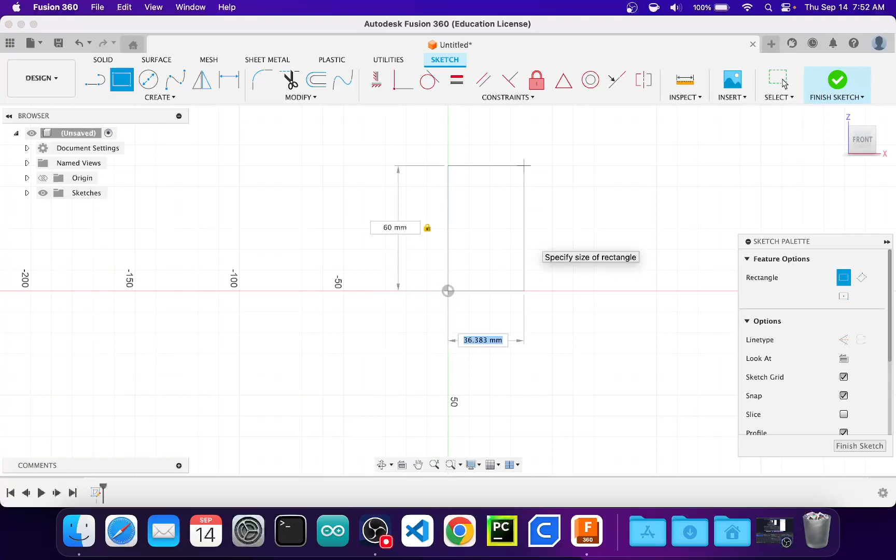So you can see I have a new design, nothing on here, no sketches, and I am going to make a box. So I'm going to create a sketch. My box is going to be relatively small, let's say 60 by 60 millimeters. And I am going to build a wall by doing an offset face. I hit the O key, I select the curve, and I'm going to offset it by 3 millimeters.

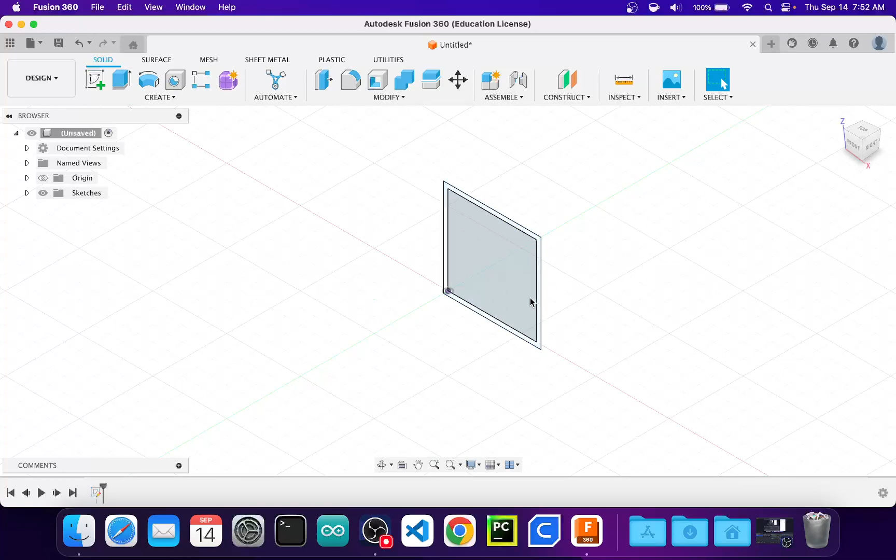That's going to be the wall size of my box. You can see how this sketch, when I extrude it in 3 dimensions, is going to build a box. So the outer length of the sides of my box is going to be 63. I'm going to extrude the side up 63 millimeters, make my sketch visible again, and extrude the base 3 millimeters. That's going to make sure I have an actual cube. Now it's a 63 millimeter cube, not a 60 millimeter cube, and the internal volume is 60 millimeters.

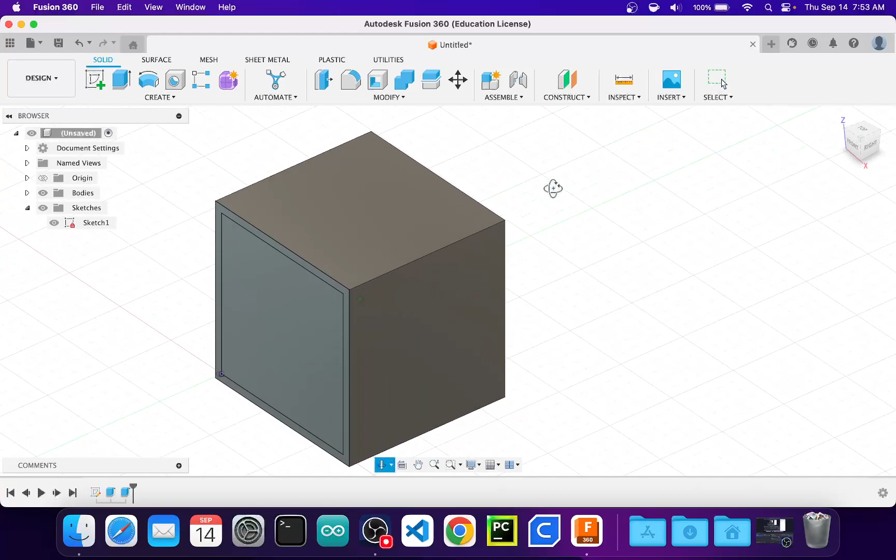So I can inspect this, make sure I've done my dimensioning right, hit the I key. That's 60 millimeters there. I can see that both of these are 60 millimeters, so I know the interior is actually a cube, but I should inspect this one as well. Also 60 millimeters. I know the interior volume is a cube. I can inspect the outside, 63.

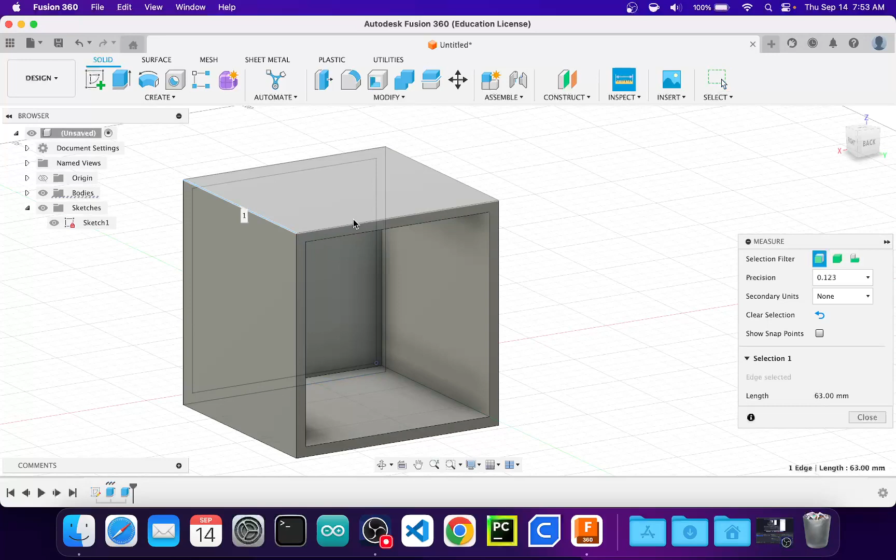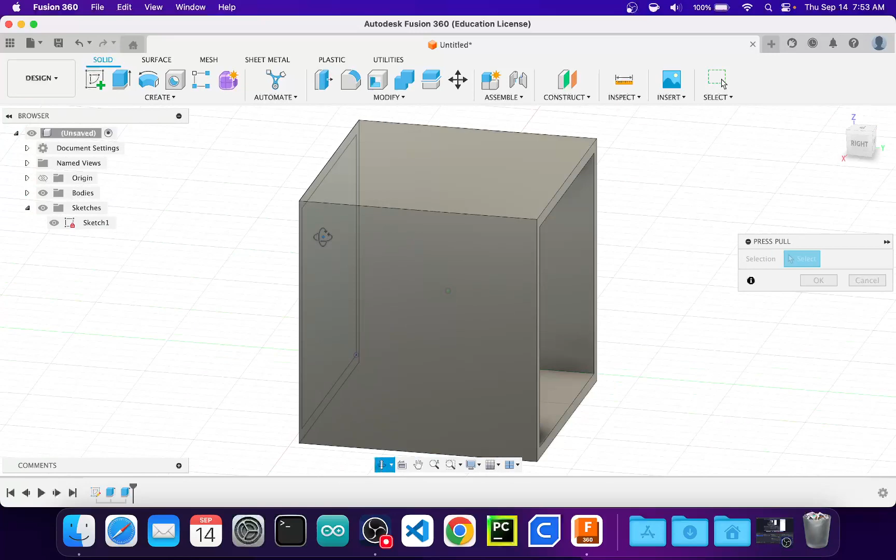66, because it's got 2 of these. So if I want this to be perfectly cubic on the outside, I need to extrude this by... I need to make my base thicker. We're going to make our base 3 millimeters thicker. And you'll notice that comes out the other direction from the sketch. So now I should have 66 external in all dimensions. This is a good example of why you should check, because there was something I did not account for.

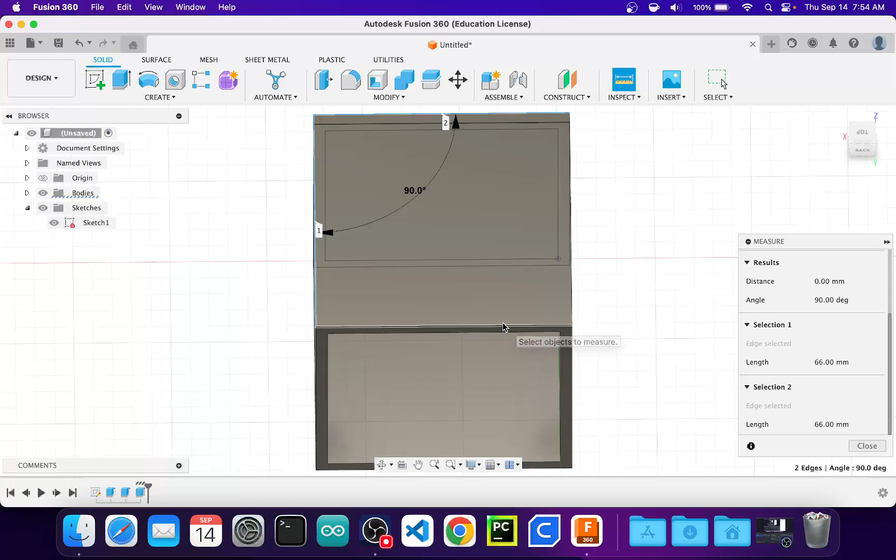Oh yeah, I need to do this one. There was something I didn't account for in the design. These should all be 66 millimeters now. Yep, and I had some specific things in mind. So if you do the checks inside of Fusion 360 when you're actually building it, it can save you a lot of time down the road.

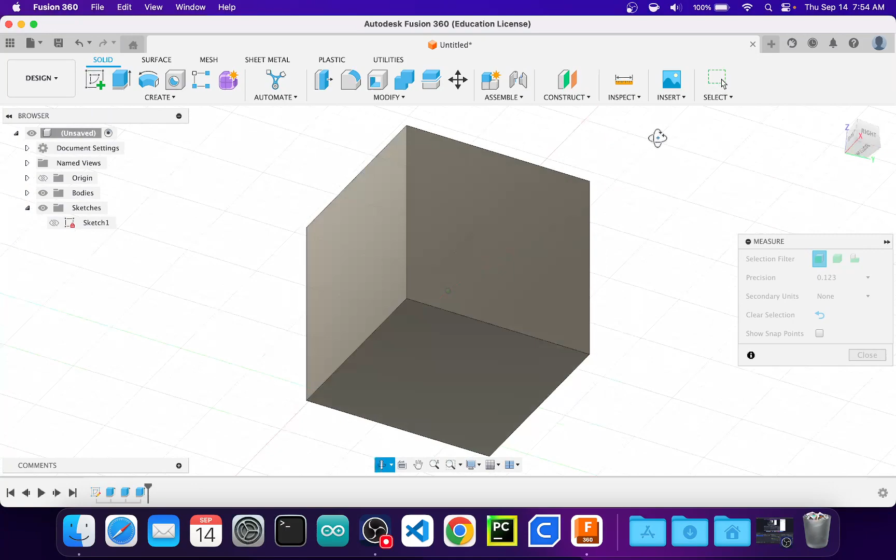So I need to find... there we go. So there's the interior space, and there are the sides. I'm always going to fillet stuff like this, I just think it looks a little bit better. We're going to put a relatively small fillet on here, maybe 3 millimeters. Now, I don't want this part to be smaller internally, so I am going to fillet these as well.

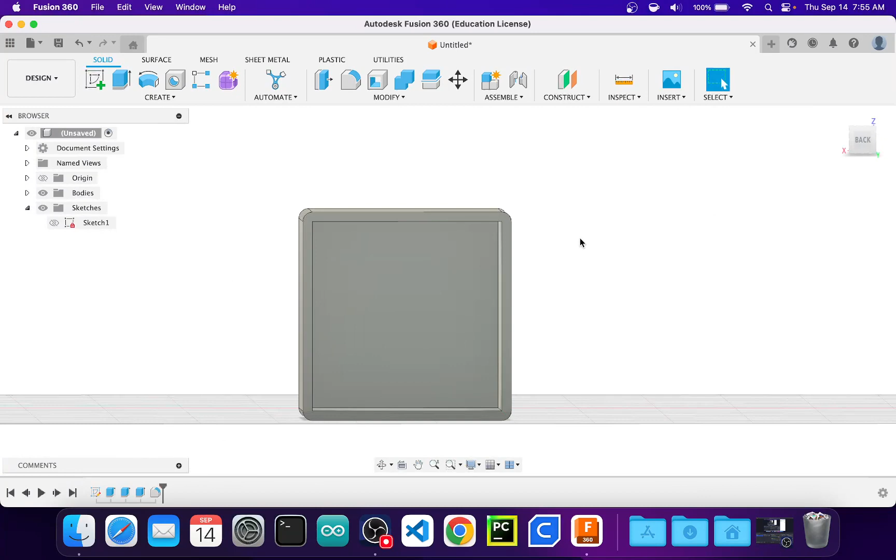And if you fillet an internal edge, it's going to actually increase the volume of it. So we're going to have a nice, clean 3 millimeter edge all the way around after I fillet this as well. See, that brings it in. So this is a pretty good box. What I want to do with this box is add a little bit of embellishment to it, because that's something we haven't really done yet.

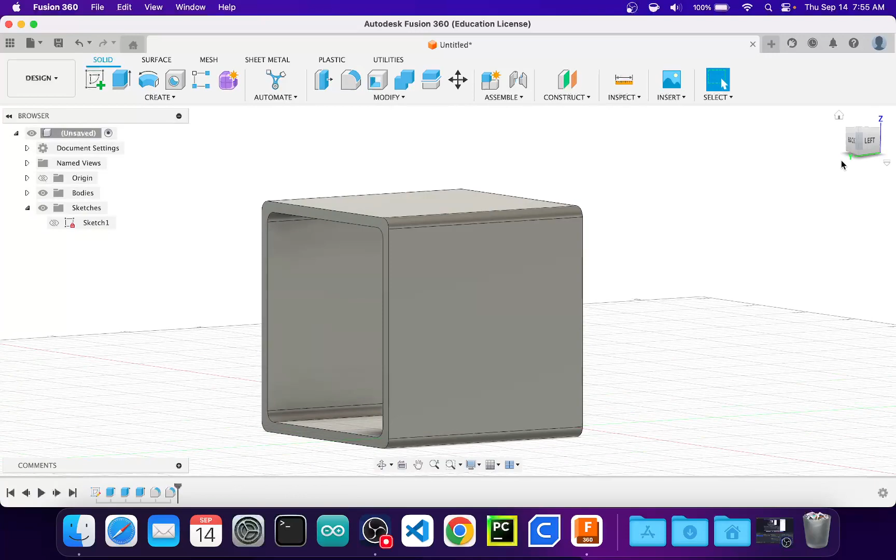So I need to center on one of the faces, and I'm going to make sure that it is facing up. So let's center on this, rotate it this way. The opening is up here. It's snapping it back when I do that, so I'm going to do it one more time, left.

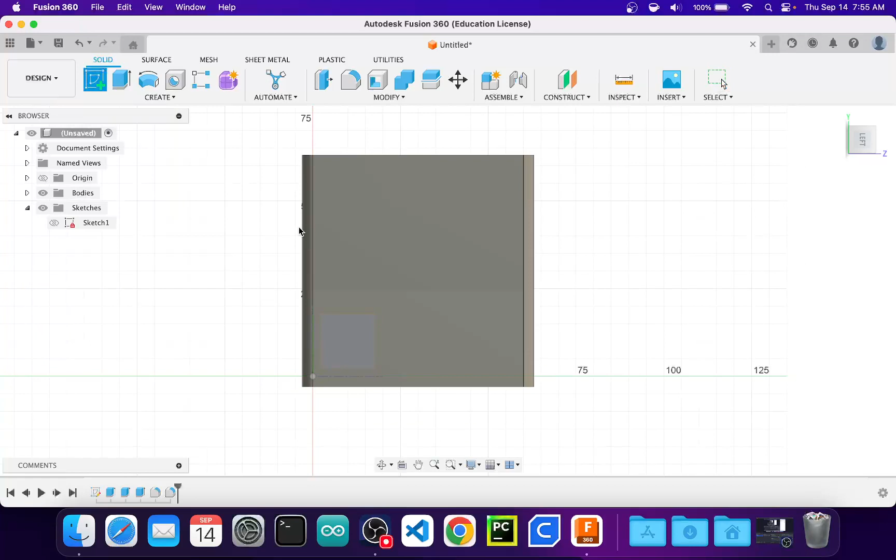Now we've got the opening facing up, and I'm going to create a new sketch on one of the faces. You'll notice I am not selecting the plane, which is what happens when I click here, I'm selecting the face itself. It's important to make sure if you're doing modifications to a face that you actually do the sketch on the face. Okay, so helpfully it rotates it around again for me. I don't want to do that, I want to rotate it back.

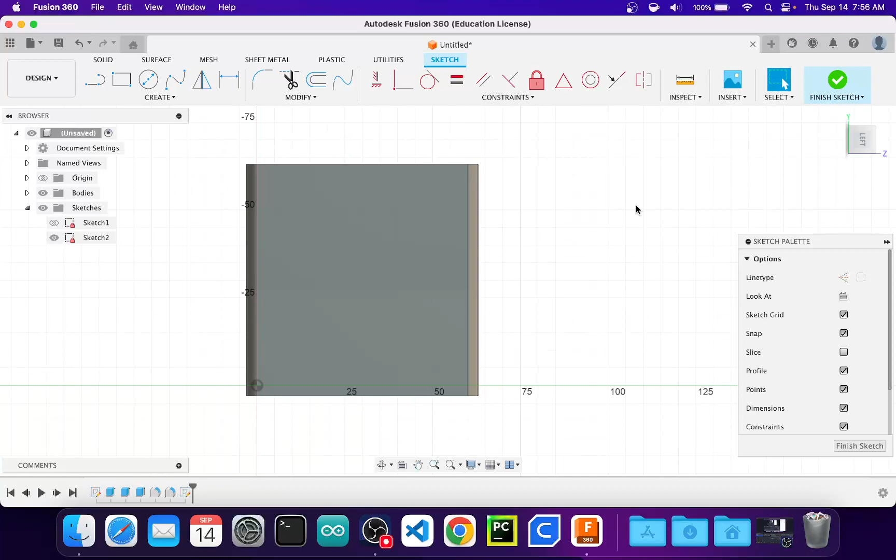I want to make sure, because I'm putting a design on this box, it has a desired orientation, so I want to make sure that I'm putting my design in the correct orientation. So one of the ways I can add

embellishment in Fusion 360 is to add text. You can go to create, then text. You can do text along a path. I haven't built any paths here. If I wanted to, I could put text on the path, but for right now, I am just going to create a little box here.

You'll notice this box, you can use the guide, so you can use lines and midpoints and stuff like that on your Fusion 360 drawing. You can set the height in millimeters of the text. This is a 66 millimeter tall box, and 10 millimeter text looks fine. I might want to center align it.

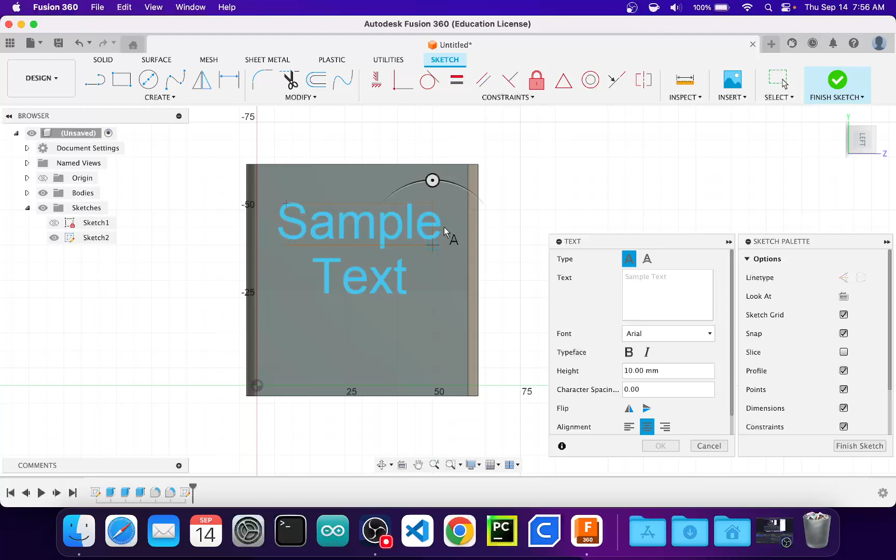Let's see, I can rotate it, but let's say I want to do it this way. I want to put a little signature on it. Okay, I want to center the text horizontally and vertically. That's going to make it a little bit easier when I try and center it on the object.

You'll notice it's actually much larger than my text box object. That's okay, I can grab this and drag it around. And I could do a line, and dimension the text with respect to the line. I'm not going to do that right here, I'm just going to go ahead and finish the sketch.

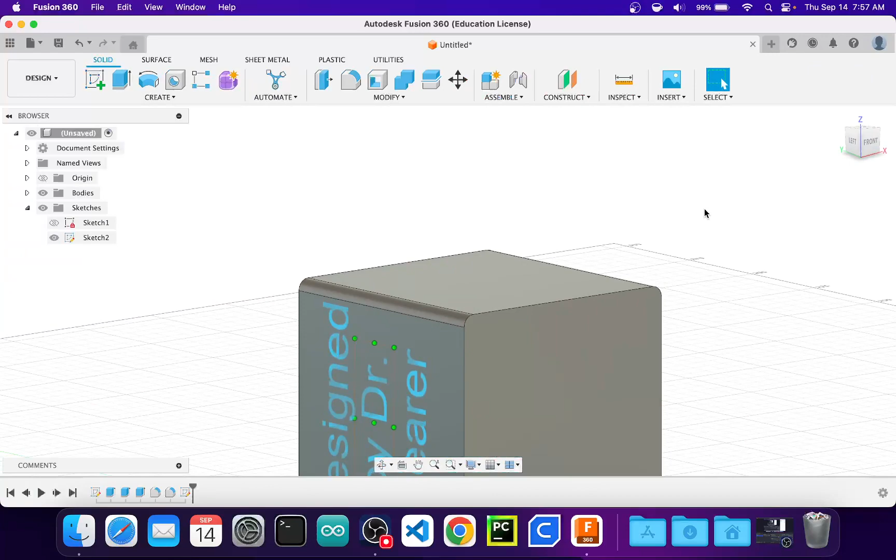And so what that gives me - and again, you can see it really doesn't like me to orient it that way, it keeps on snapping it back - but you can see this is oriented the way we wanted it to be. So I have two options for how I'm going to actually make this text show up on my object.

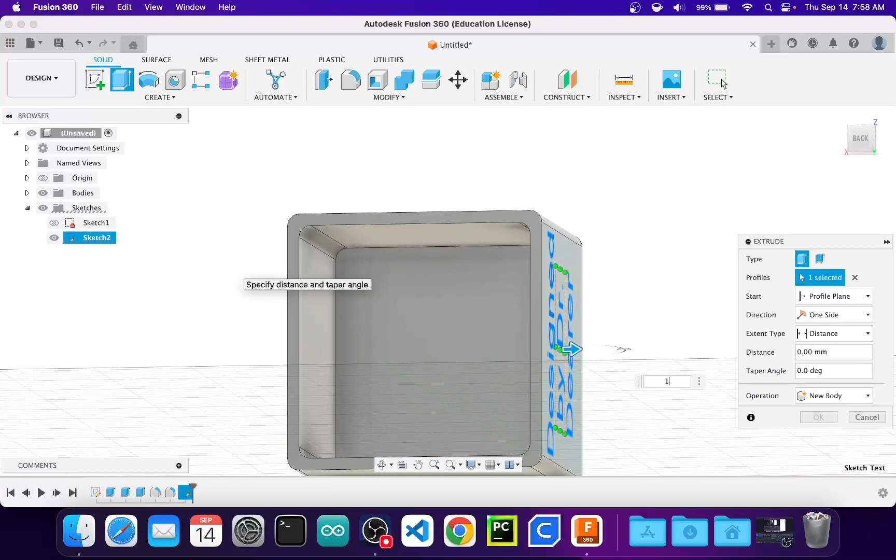One of those options is to press pull it out. So I can select the text as a face, and I'm going to orient this like this, and I can bring it out by 1 millimeter. If I do that, it will actually print this text as a part of the box in the plastic, 1 millimeter out, so you'll ask yourself, well, what orientation are we going to print this in?

And if we print it like this, how is it going to handle the overhang on that text? It should do okay with just 1 millimeter. You might have some edges that look a little bit worse for wear, but this is something you'll want to just mess around with and see how it actually prints.

So if you were doing this in production, what you would want to do is a smaller test where you do like a 10 by 10 millimeter cube. You put one letter on it, either press pull it out or press pull it in the way that you want to, and see how it looks.

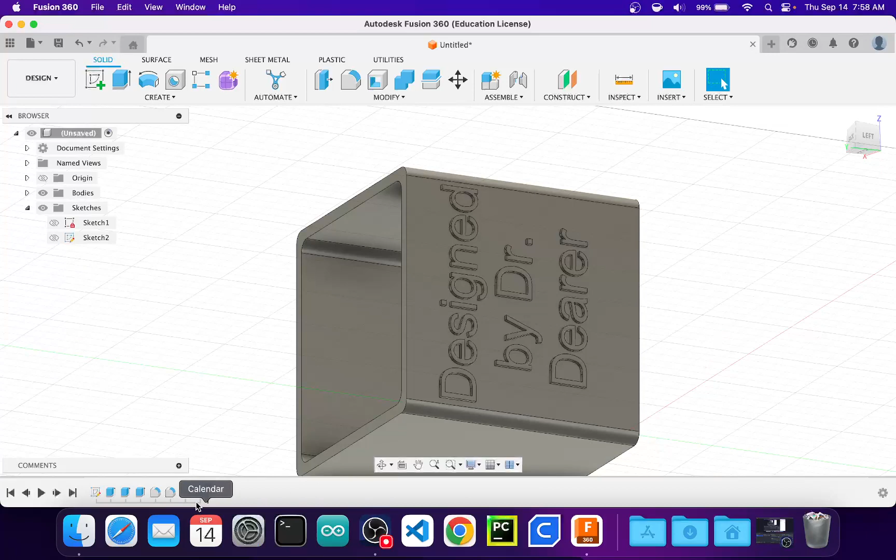So the other way we can get this to show up is we can press pull it in. Instead of going 1 millimeter, I'll go -1 millimeter. Let's go -2. We need to change the operation to a cut and hit enter, and you'll notice now it is inset - it doesn't go all the way through.

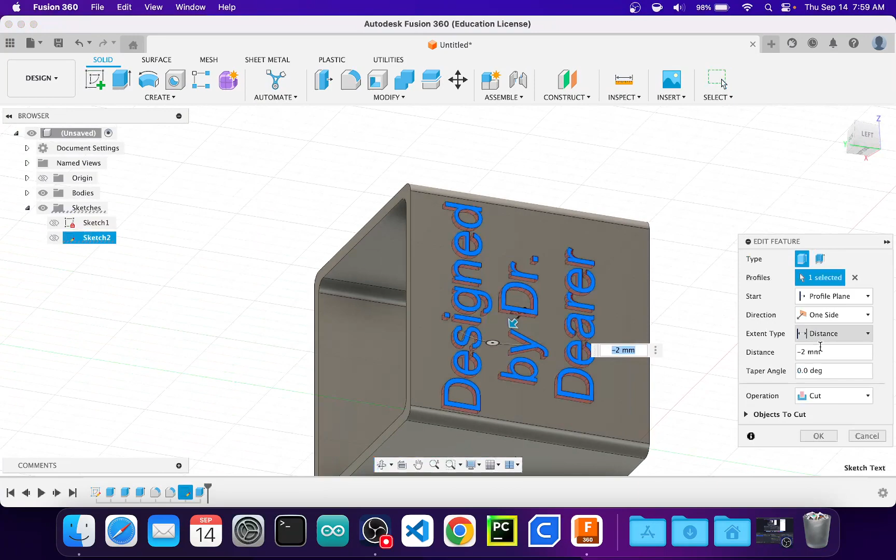I can change it so it does, but you have a problem with letters when you cut all the way through. I am going to have a problem with letters that have parts that are sort of floating off in space, like the middle of the B, the middle of the E. You'll notice it creates all these extra bodies because all of a sudden I have a bunch of separate little objects here, and we don't really want to do that.

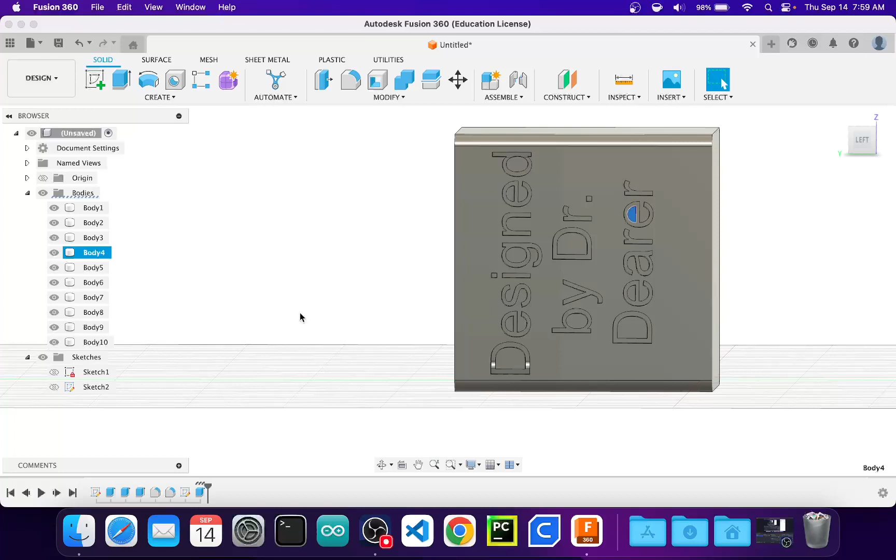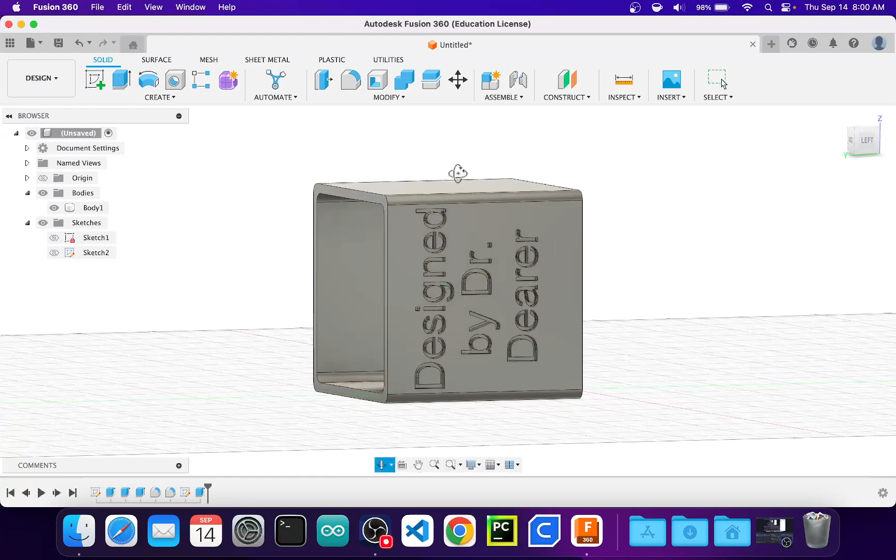So I am going to edit this feature back and change it to a -2 millimeter cut, so it goes into the box but leaves a little bit of material behind it, so that I'm not going to have a bunch of little tiny parts of letters fall out when I try and print it. So that is one way you can add embellishments.

And I could have used a different font. I could have done it along a path if I wanted a curved font or something like that - those all work very well. The other thing you can do is you can actually bring in a certain type of image file. So I'm going to go ahead and reorient the shape to the way I want it.

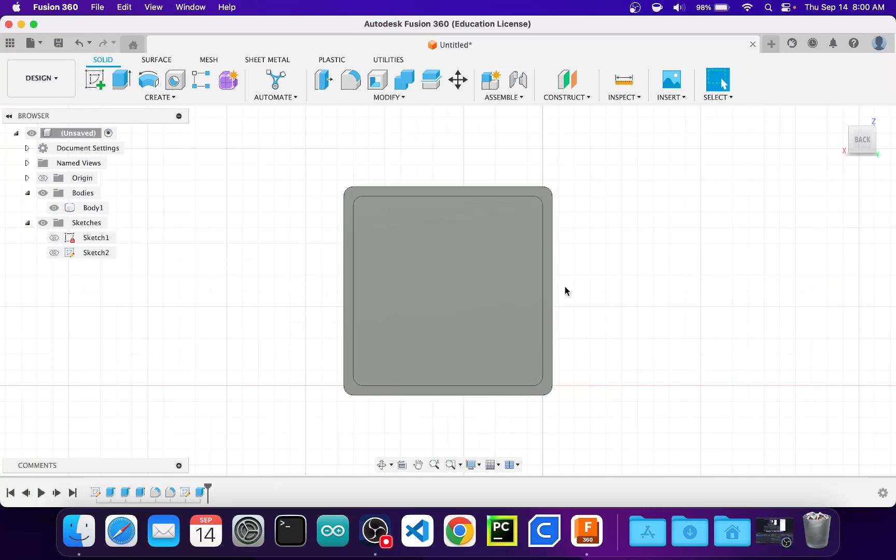Yeah, I want it facing up. And I am going to add another sketch on this face.

What I'm going to do here is insert what is called an SVG. If you want to take an illustration from outside of Fusion 360 and add it to one of your printed objects, you can, but it has to be a vector drawing. A vector drawing represents an image using a series of lines rather than pixels. SVG is the most common format for these.

Some images that you can't bring in are things like PNGs, JPEGs, bitmaps, GIFs, stuff like that. Those are raster images, not vector images. You have to have a vector image because it has to be able to make those lines in the sketch.

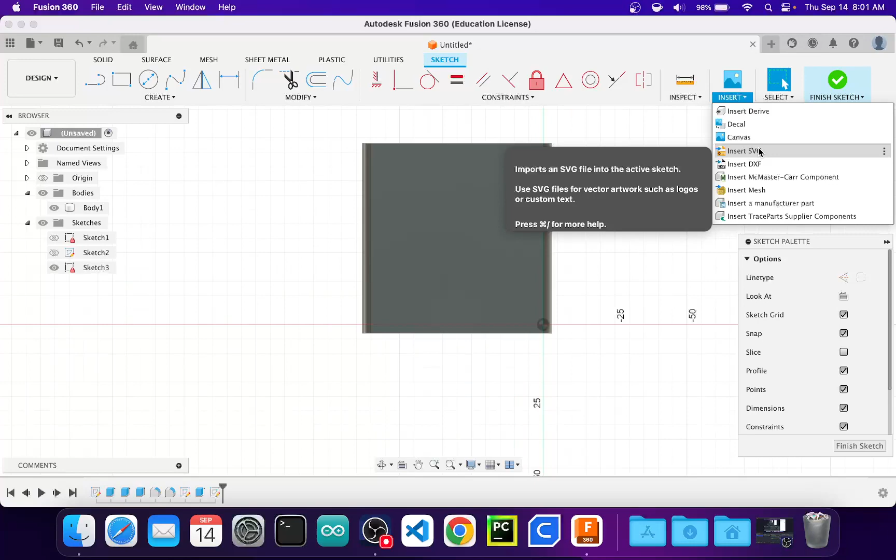So I've downloaded, I'm going to insert from my computer, and on my desktop I have downloaded a Raspberry Pi logo, which is a very easily available vector image.

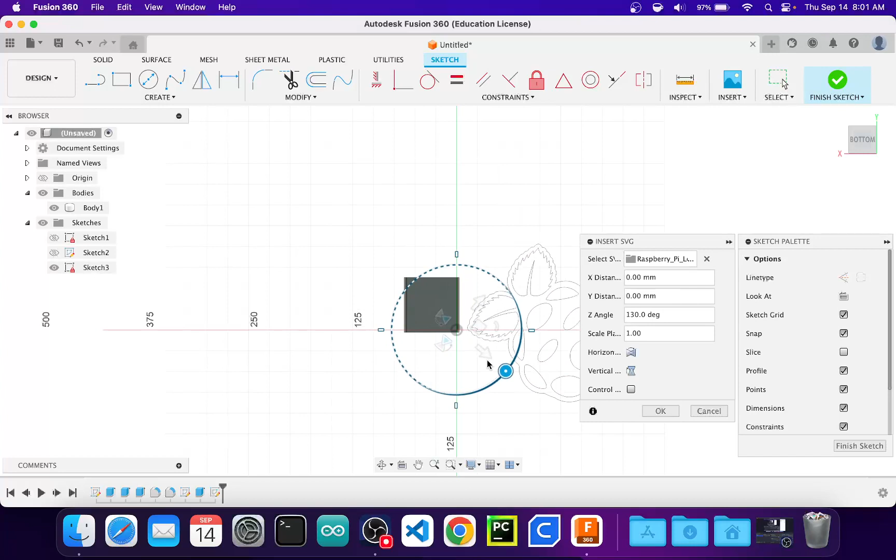Now you'll notice it comes in very large and rotated. I cannot figure out why vector images come in the size and rotations they do. There's no real rhyme or reason to it as far as I can tell, so I always just work with what I have.

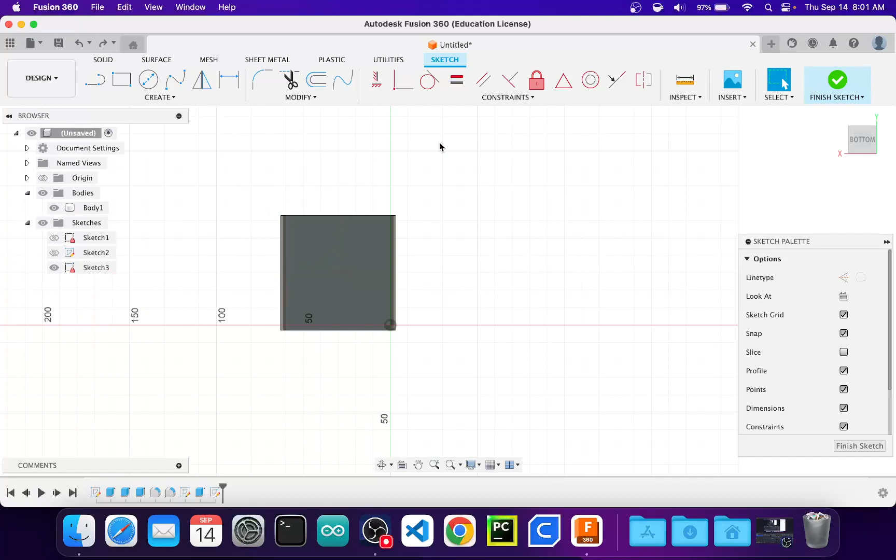As soon as I bring it in, it gives me tools to resize it. So you got to be careful during this initial part, because when you apply these scales... I'm going to scale this down 0.5. You only get the chance to do this once, and when you apply the scales, I hit enter and it immediately popped it onto the drawing, and I lost my ability to scale it.

You can probably do that after the fact. This is usually the last step of a project for me when I'm adding these little embellishments, so I usually don't have the patience to really do that. So I'm going to put in 0.5 here.

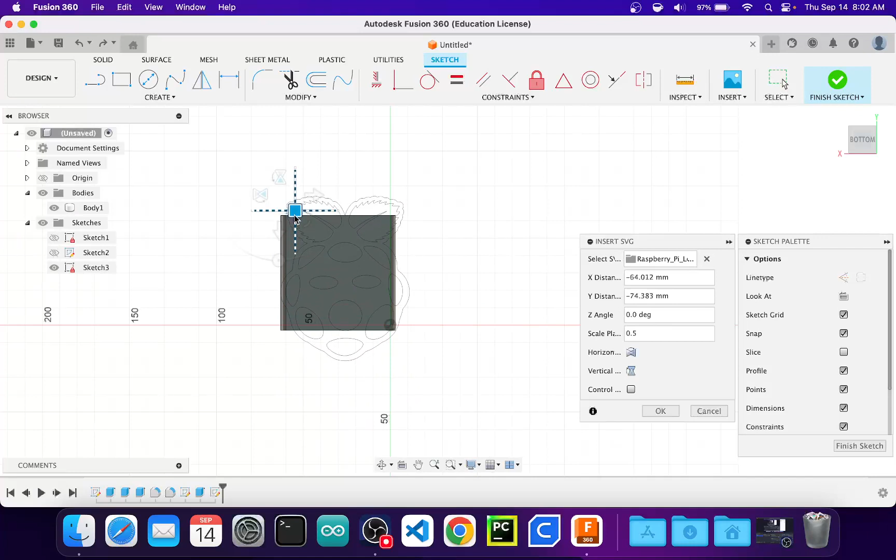I'm going to mouse off, and then I can rescale it, but I am rescaling it from this size right here. So if I did 0.5 again, it's probably going to be too small. I'm going to do 0.8. That is pretty close, I'm going to eyeball it on this. I'm going to do 0.8 again.

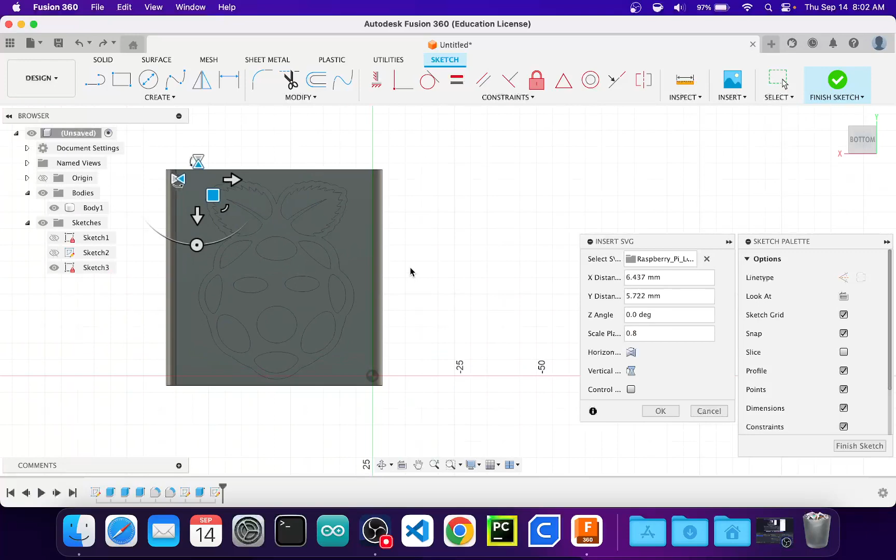You'll notice this is pretty good. There probably is a way to exactly center these. I usually use these little grid lines - you can see there's very faint grid lines in the back. So what I usually do is count the grid lines and try and get it as best I can.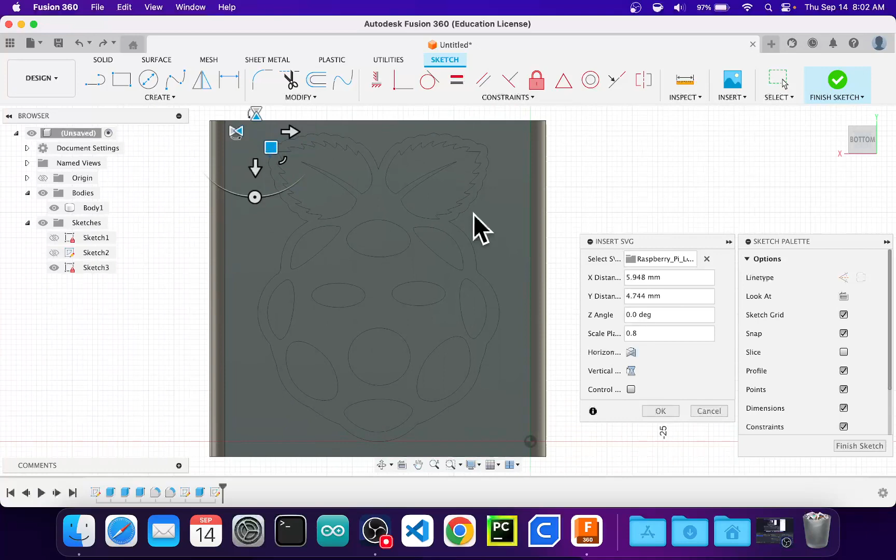Again, these embellishments, this is not a functional part, this is an embellishment. So if it is off by 1/10 of a millimeter, number one, that's not very visible, and number two, it's not going to cause anything to break.

So I'm going to finish the sketch here, and you'll notice now I have this nice Raspberry Pi image on here that I can press/pull. So I'm going to inset it by 2 millimeters again. You can see what this is going to look like when it prints - it's going to have this Raspberry Pi logo visible as an inset on this side of it.

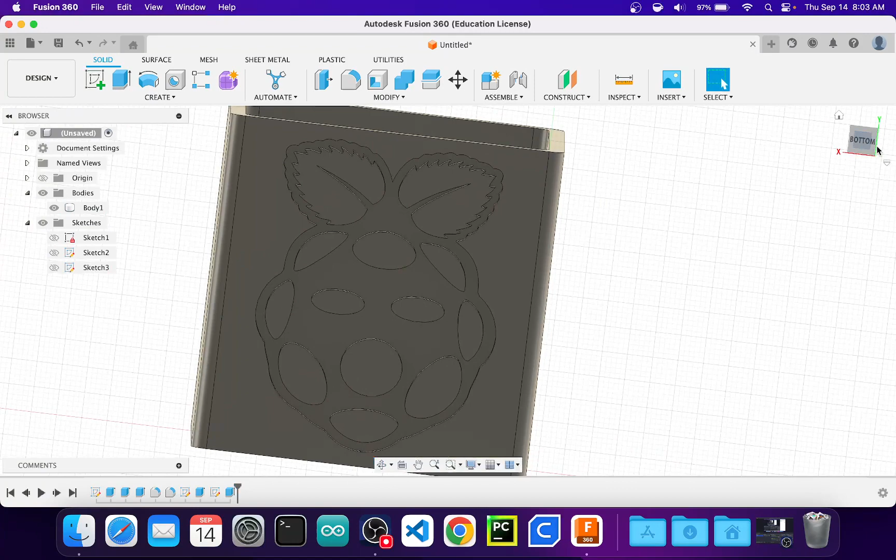I could add another one to the other side, and I could actually do that without adding an additional sketch. If I did another press pull on this face, and I started from an offset - this thing is 66 millimeters thick, I want to offset it by -66, which is going to take it in that direction. And the way I knew to do negative is just by the way the arrow is facing.

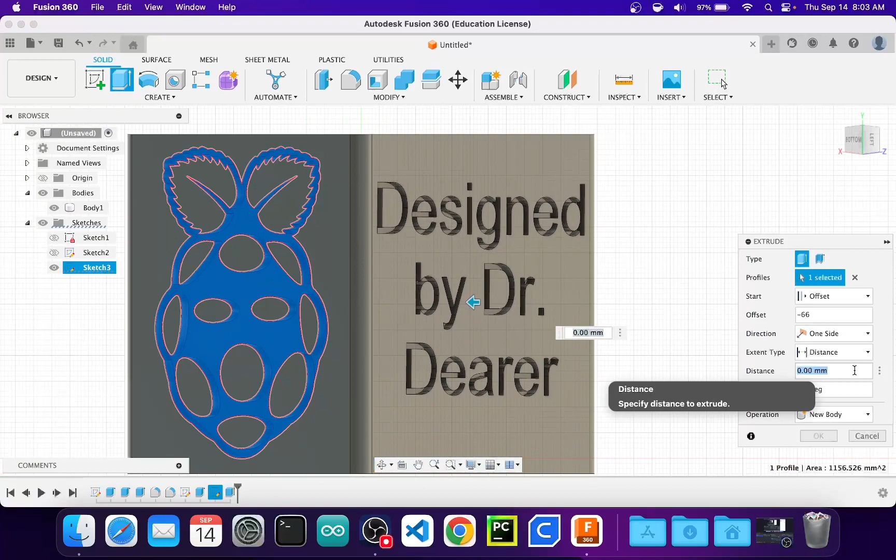I'm going to go distance 2 millimeters, and that is going to cut. I'm going to hit OK, and now I've got a nice little symmetrical box.

So I could print this out, I could use it to store it. This is probably big enough to store Raspberry Pi Zeros. And I could see what these embellishments look like, and if I liked them, I could keep it. If I didn't like them, I could redo it and print something that I felt better matched my design idea.

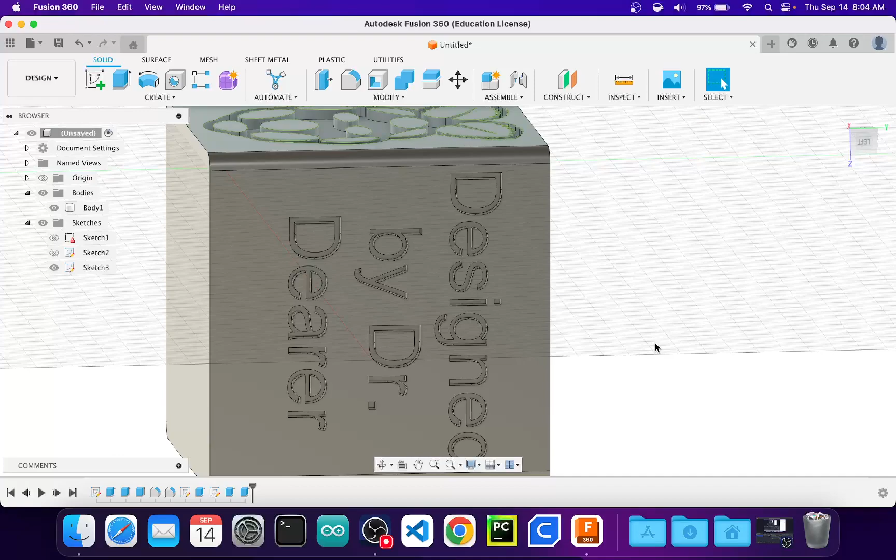So that is a really quick rundown of how to do embellishments, meaning import vector files and do text in Fusion 360. You will probably want to do this on your personal projects. You may want to add some of your own designs, or you may want to add some text.

This is also useful if you've got something that's complicated to assemble and you want to build in some assembly instructions right on the object itself. If you're making something that has a bunch of snap together pieces, you could label the tabs and the notches in the designer so that you didn't have to build a bunch of complicated instructions for it.